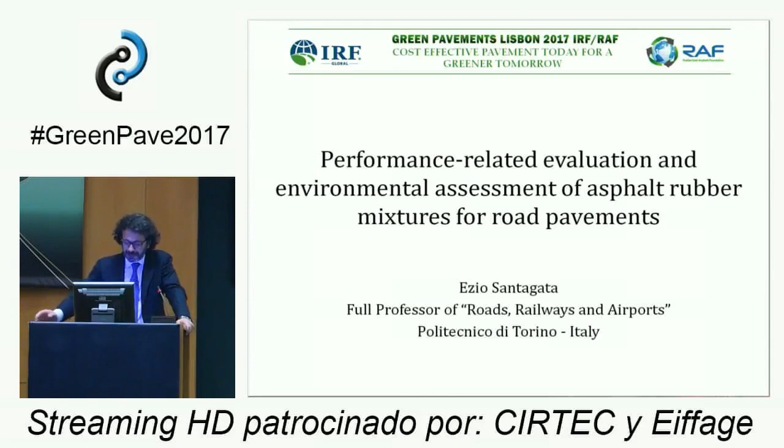The opportunity is to talk about asphalt rubber mixtures and materials, which is one of the areas of specialty of my research group in the last, I would say, 10 years.

Brief outline of my presentation. I will spend a few words on my institution, the Politecnico di Torino, and talk briefly about my pavement engineering research group. Then I will try to put the subject of crumb rubber-related technologies in perspective by showing what is the state of implementation in Italy, and what are the problems we had to face in the past and we are still facing. From that, I will move to a series of what I think are unsolved dilemmas, areas of knowledge which should be further investigated, highlighting some of the most relevant research needs. Then I will show you, following our research approach at the Politecnico, some hopefully interesting results touching upon several topics mentioned by previous speakers. I will also highlight some doubts, because doubts are important as they lead us to a better understanding of phenomena. Finally, I'll try to close up with future perspectives.

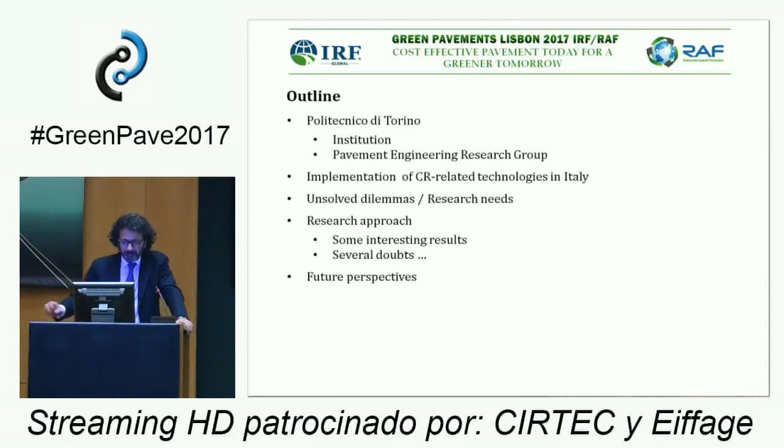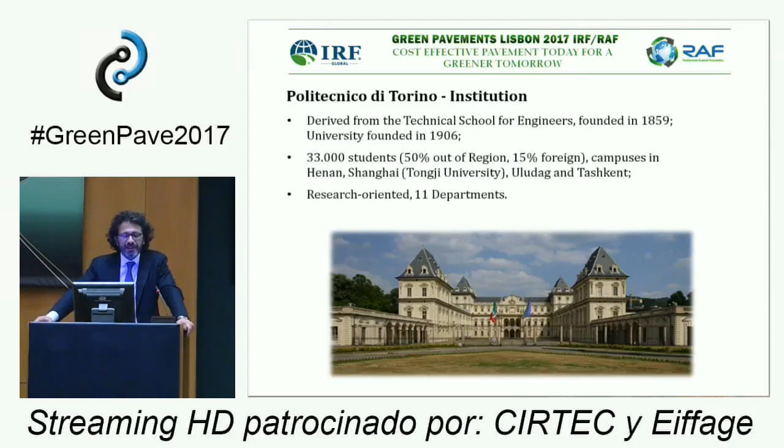Just a few words on my institution, the Politecnico di Torino. It is, I would say, one of the leading technical universities in our country. It was founded in 1859. It has a quite large student population with an international flair. We have campuses in China, in Turkey, and in Uzbekistan, and nowadays it is organized as a pretty much research-oriented university.

My group is composed of young, enthusiastic people. We focus on bituminous materials and pavements. Our laboratory, the core of our activities, focuses obviously on bituminous materials, but more generally on innovative and recycled materials, which fits perfectly with the subject of green pavements. Finally, we provide a number of services, including testing services and specialized training.

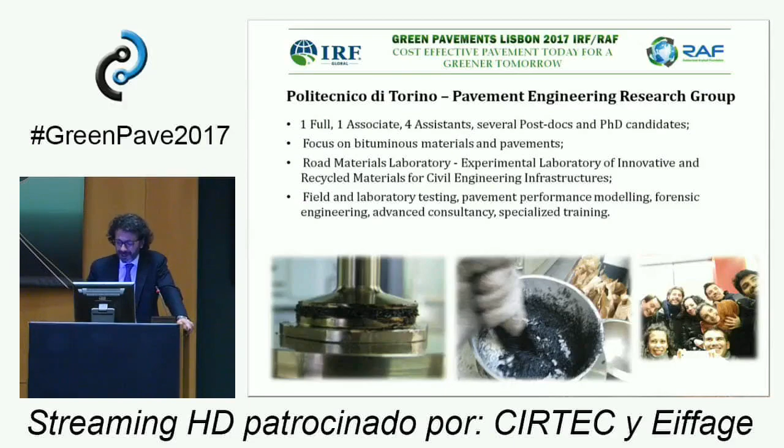We have this international attitude. Currently, we're hosting Professor Underwood from Arizona State University. He's in the audience, and he'll give a presentation in the afternoon. Of course, we have several exchange programs going on.

Just to give you an idea of the type of activity we carry out, it has changed over time, starting from the 60s to nowadays. If you look at the red portion of those pie charts, you can see that progressively our lab and group has shifted from testing and quality assurance services toward a core of research activities and projects.

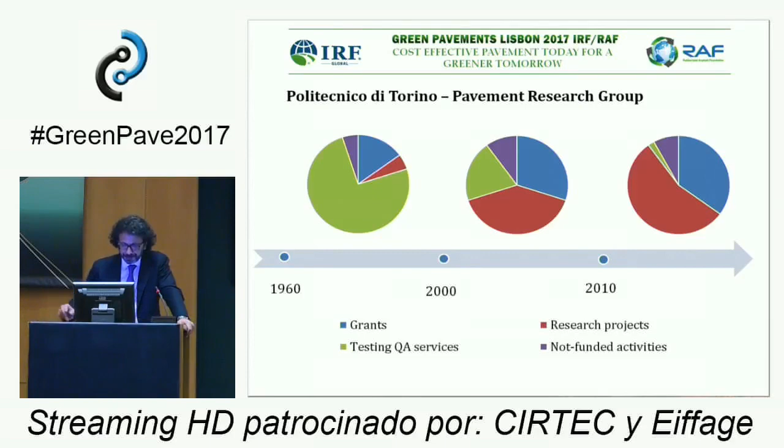So getting to crumb rubber-related technologies, what is the situation in Italy? Well, I think we should observe that there is a widespread establishment of end-of-life tire grinding plants all over the country. What is this crumb rubber used for? Well, a lot for energy production, unfortunately - so George will get angry now, but this is the situation.

Some of it goes for recycling, and of course, as pavement guys, we would really support the idea of using these materials in pavements. However, there is one constraint, a local one, which is that of a single asphalt rubber supplier in Italy. This makes things quite complicated, as it's a true obstacle in attributing construction works if there is a single supplier.

So we need some kind of competition to get things going, of course. Nevertheless, there has been a lot of experience on gap-graded and open-graded mixtures for local and provincial roads, and eventually some increase in experience on stress-absorbing membrane interlayers. I think there is a need to expand the realm of possibilities, and recently we've worked quite a bit on dense-graded mixtures and on hybrid mixtures with low temperature applications and low viscosity additives.

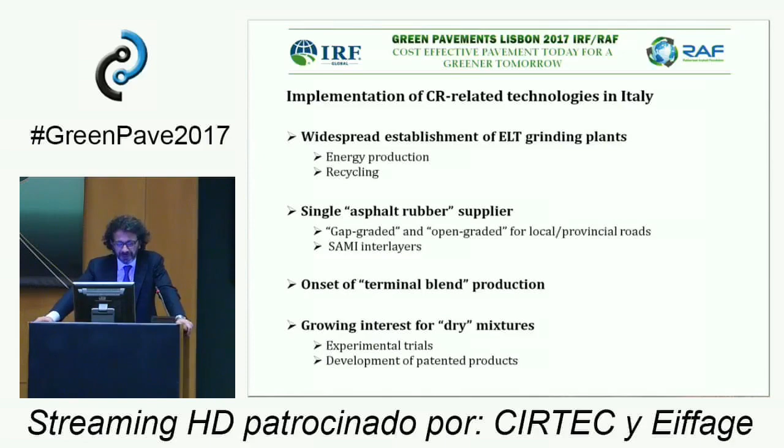The constraints for implementation following this scenario are a limited direct experience and information. Even though the number of applications is increasing, for administrations, the numbers and the quantities are still small. So we really need to put an extra effort in disseminating knowledge, in showing our results, in lobbying if the case. As a professor, I can do part of the research, do it rigorously, and show that it works if it does.

And there is an absence of technical specifications. This is another constraint. If these materials are not in technical specifications, regardless of their good reputation, there is a formal problem. So we need to get these materials into technical specifications. Maybe in part answering one of the questions asked by George, we need technical specifications because this is the engineering way to do it. I don't know if the escort service is implied in technical specifications.

So as I mentioned, we need a wider commercial competition, and we need to answer unsolved dilemmas. So any professor would conclude more research is needed—okay, we're happy with that. Now, what about the unsolved dilemmas? I tried here to highlight some. I understand this may be a little bit technical, but I'll try to raise some interest in these bullet points.

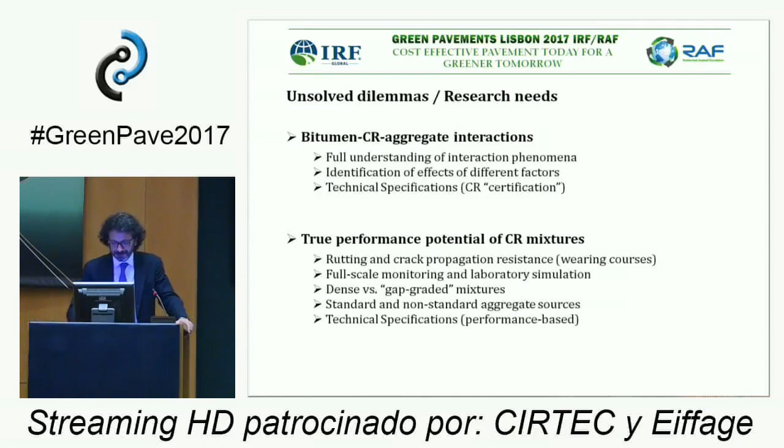On a different level, we have issues related to health risks and life cycle assessment—something which has to do more with the social and environmental components of the overall sustainable pavement. Now, with respect to health risks, one of the topics that has been debated quite a while is that asphalt rubber can be really bad for workers' health. And this derives from just one problem: the smell, okay? But does this imply that it is bad? We cannot just answer no with no information.

We need to investigate, and we've done this for quite a while, looking at the gaseous emissions produced on site. We did a lot of sampling and laboratory testing. In the laboratory, we simulated possible emissions and always compared the results obtained to standard mixtures.

Per se, gaseous emissions are not good, for any kind of asphalt-related application—that's not what you'd want. But when you compare asphalt rubber products to standard products, you may see a small difference, and in our experience that difference is small. This can be sustained by the modeling of toxic and carcinogenic effects. Once we have this data, we can go to administrations and say, look at these data, they show there is an equivalency between these two kinds of applications. So it's very important.

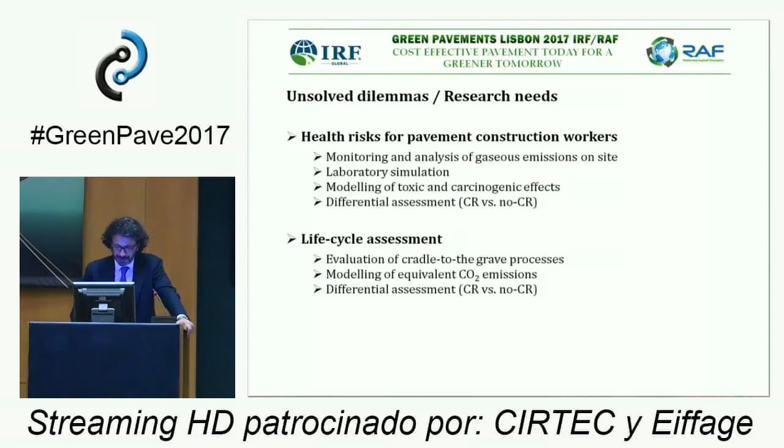These slides describe quite a bit of what we've done, with several examples. Just to give you some information on the approach, we moved from the local to the international scale with several projects—local, city, provincial, national, and European—and in each case we adopted a multidisciplinary approach, combining the know-how and experience from the pavement engineering group and the sanitary environmental engineering group.

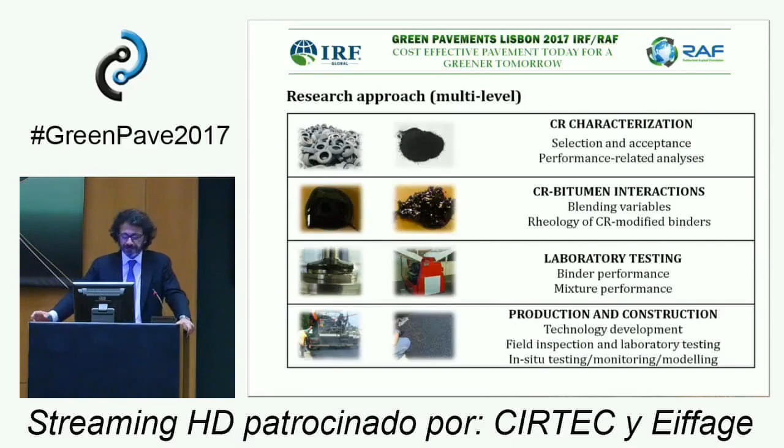So we are two groups in the Politecnico working very closely, and we work at a multi-level structure, moving from crumb rubber characterization to the analysis of crumb rubber-bitumen interactions, which could be asphalt rubber, or the mortar formed within a dry mixture. We do a lot of laboratory testing for performance predictions, and then of course field testing, which includes technology development. I'll try to be synthetic in illustrating some of these results.

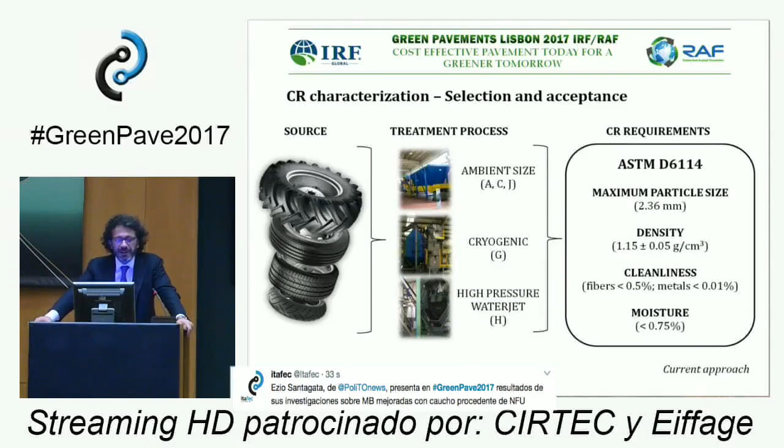Starting from crumb rubber characterization, in the literature there are some requirements for acceptance. Regardless of the treatment process, there are constraints related to maximum particle size, density, cleanliness, and moisture—very basic, listed in ASTM D6114. This is the current approach, but it really doesn't tell you the true value of a crumb rubber product.

First, we need to organize the standard information in a better way. One good example is particle size distribution. We sampled at least 20 to 25 different products, all sold or available for asphalt rubber production, and found a huge difference in particle size distribution—not only with respect to ASTM standards, but in absolute terms. So we suggested formalizing three different categories: coarse, standard, and fine gradation, in order to tailor different applications for different end properties.

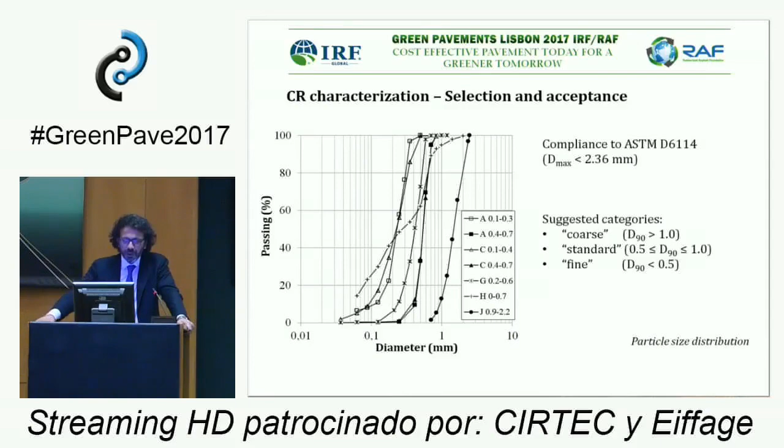What about density? This is a histogram of different densities obtained. We observe that densities are comprised within quite a narrow range. Of course it's rubber, and from one tire to another the variation in density is limited. Nevertheless, density is important if you want to make predictions on surface area, so let's keep it as a good requirement.

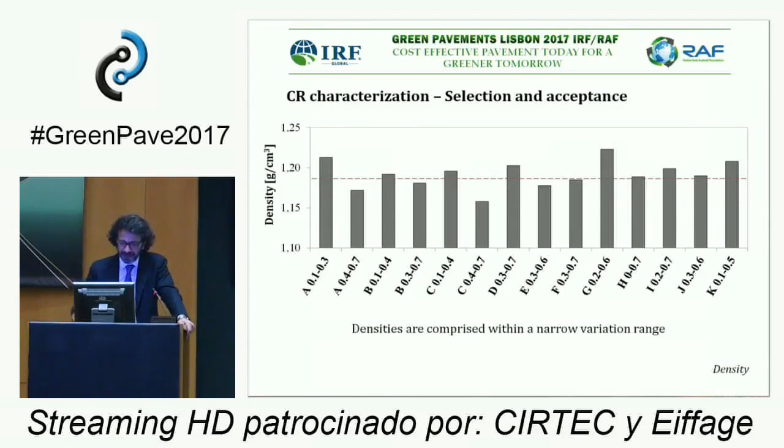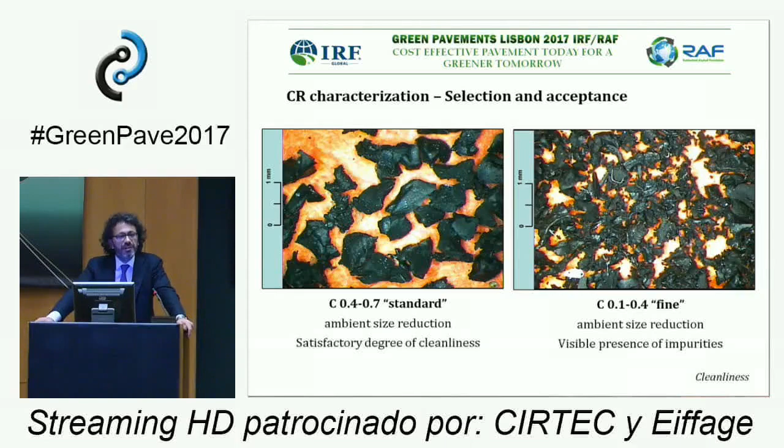What about cleanliness? Well, cleanliness has to be looked into. We usually do this by microscopical observation. In general, we observe a visible presence of impurities, metal impurities, in finer products. So this should be looked at with care.

And one very important thing is morphology. What is the ideal shape of crumb rubber? Do we want stretched and corrugated particles, or more compact, round or polyhedric particles? Depending on the kind of interaction we desire, we may have different requirements, but we need to put a number to that.

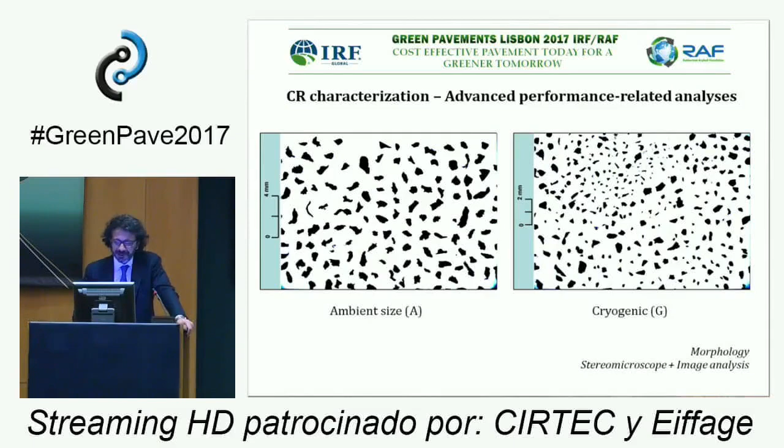So very simply, we do some microscopic observation combined with image analysis. We convert particles into objects which have physical quantities, and for these quantities we can make a modeling which allows us to calculate surface area, a true surface area which takes into account the degree of elongation and the surface irregularities of the particles.

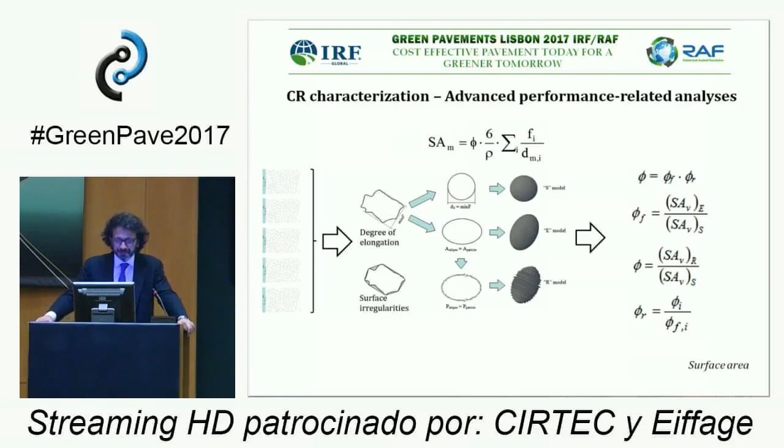Okay, so coming to bitumen crumb rubber interactions. What about these? Well, we do know that there is a time-dependent interaction going on, which starts from mixing and goes through a swelling phase, and it leads to depolymerization at a certain point, and eventually it can lead to digestion. And we know that the time scale of these phases and their extent is affected by several factors, listed there: the type of base bitumen, the properties of crumb rubber, the presence of additives, and several mixing variables such as temperature, time, and shearing forces. So we need to take them all into account.

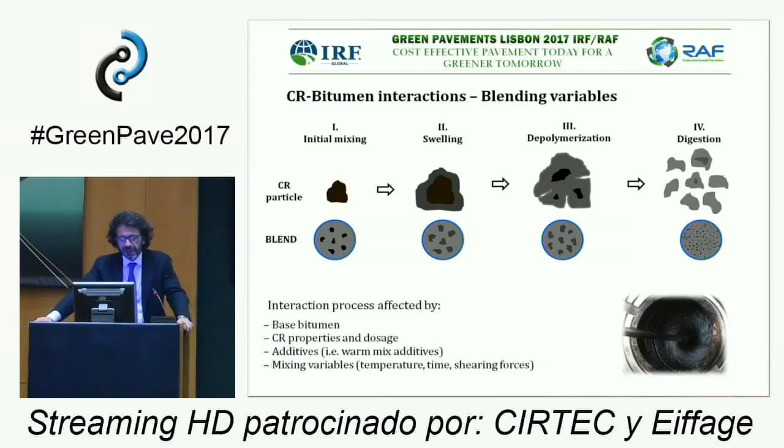And this is important because depending upon how this process evolves, the product will be different. Now, this is a very good figure of viscosity tests in which, for a certain crumb rubber, we see that as a function of curing time, viscosity peaks and then degrades. We know about this, okay? But what we've done is to introduce two numerical parameters, a swelling rate and a degradation rate, which simply are the slopes of the upper and the down curve of this graph. And these will synthesize the time-dependent interaction of bitumen with crumb rubber.

So to me, ideally, in a spec, any producer of asphalt rubber should give information on this, because when we produce asphalt rubber, we want our material to be very close to this peak. Usually, the assumption is that it should be produced to be slightly green, not totally ripe, so we want to be very close to the peak. And in order to be there, we need to have information on the swelling rate and degradation rate of our product.

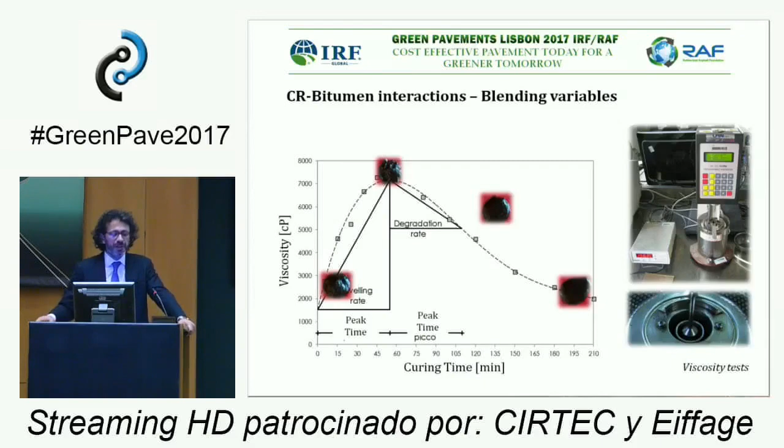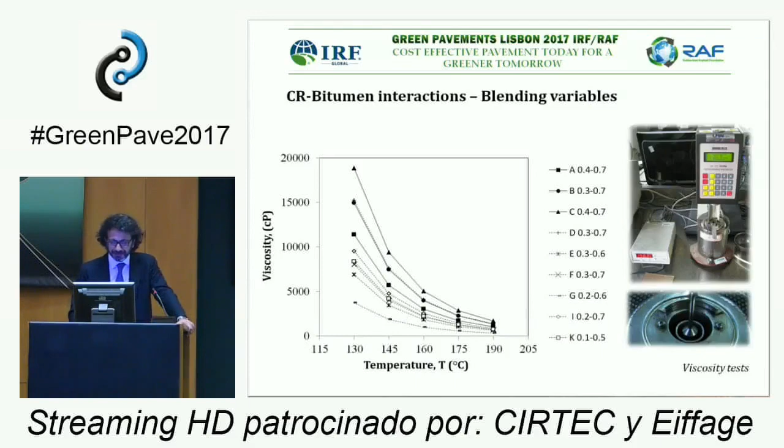And of course, if we do not have this information, we may produce different binders with the same base binder and different crumb rubber products and obtain viscosity curves which are completely different. Now, this means that either the crumb rubbers are really different, or they have been sampled and stopped in production at a different point in their evolution. So this really shows that you can get any number from viscosity if you don't control those two factors I'm talking about.

And of course this also reflects on rheology. We do a lot of rheological testing, producing master curves of the complex modulus and the phase angle. We can get a lot of information from this data and relate it to performance, but this needs to be related to production conditions. If not, these are just numbers, they are of no use.

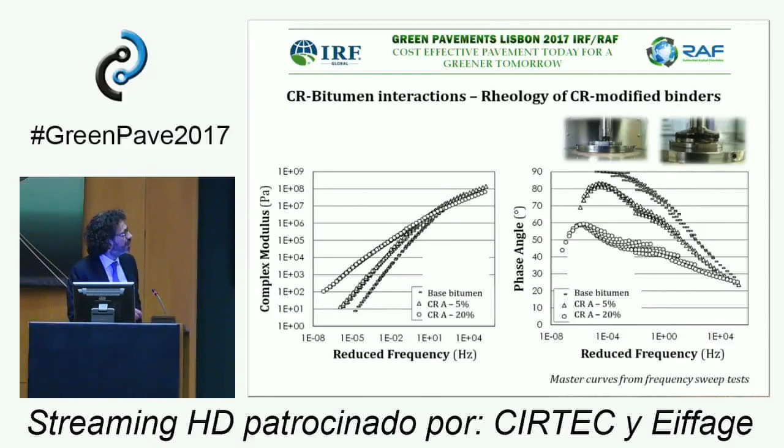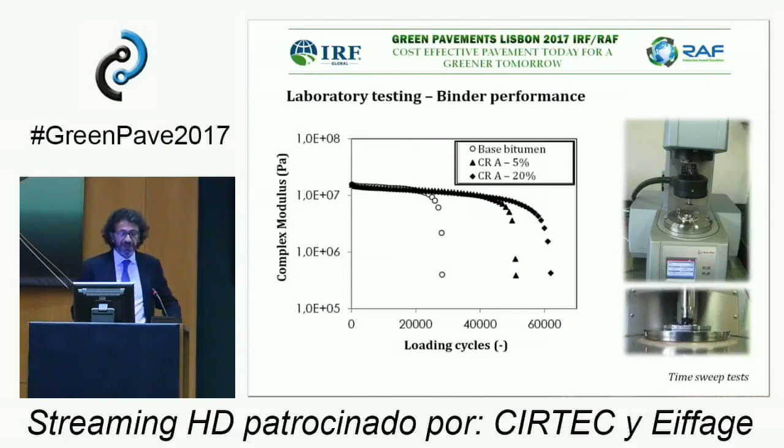This is quite interesting. What about fatigue? This is quite nice. These are repeated time sweep tests carried out on a base bitumen and on different blends obtained with increasing quantities of crumb rubber. Does fatigue life increase? Yes, it clearly does, and this is also shown by my mixture testing.

What about resistance to rutting? Once again, we have very good results here. If you look at this asphalt rubber product, this is the non-recoverable creep compliance, let's say deformability, permanent deformability. Very small when compared to a polymer modified binder with high polymer content, a polymer modified binder with low polymer content, and neat bitumen. Okay, this is really impressive.

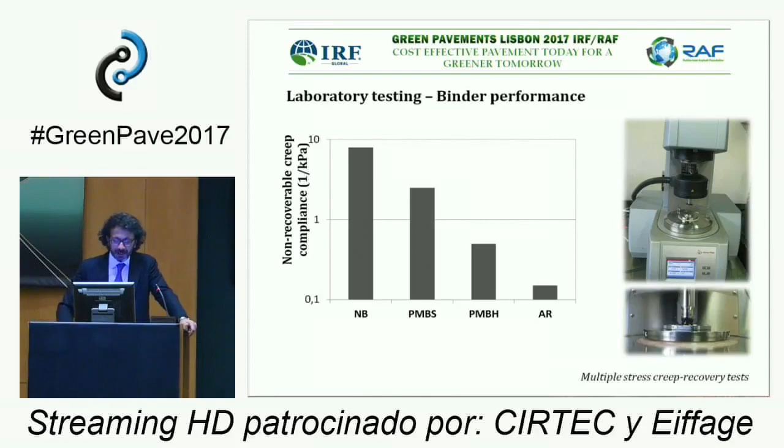So what is going on? Is there anything wrong in this? Well, is it bad performance or is it ineffectiveness of testing protocols? And I guarantee that the right answer is the second one. We need to use the right protocols to investigate, in comparative terms, the performance-related potential of a material.

Now, the problem here is that in wheel tracking tests we have no lateral restraint, and with non-continuous grading curves this will be really penalizing. So we cannot go with this kind of testing, or we can use it, but then we need to twiddle around with the data, and I don't think that's the right way to do it.

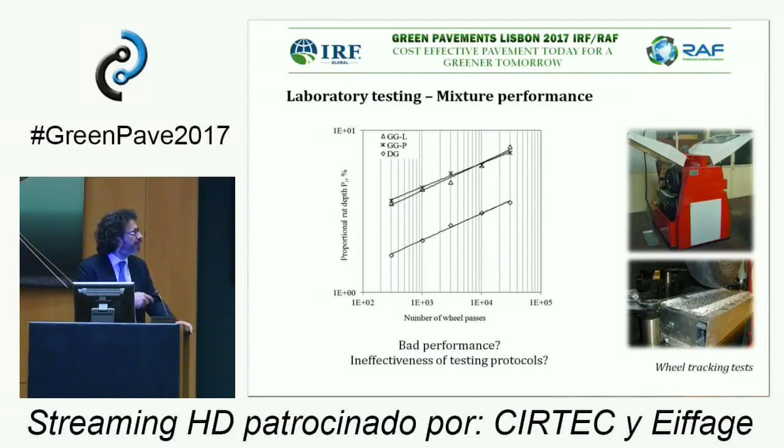So we can approach this with different pieces of equipment, such as the asphalt mixture performance tester. In that case, we will need to apply a confining pressure. But really, this is a good example of what could be a wrong conclusion if just presented in very simple terms. Look at the numbers and you get a wrong conclusion. So we need to really be careful.

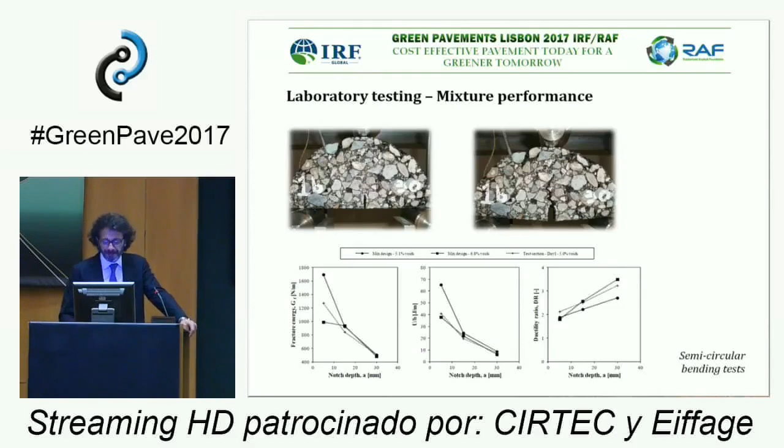And similar observations should be done on crack propagation. We want our material to have a very high toughness, and this will occur with the presence of rubber, but we need to choose the right configuration, and in particular the right notch depth, in order to highlight the true effects of rubber. If not, we have the same risks I just showed you in the case of permanent deformation.

Some words on part of the activities we developed in technological development. As part of a European project, the TYREC4LIFE project, we worked on the design and construction of a full-scale dry mixing prototype. The idea was to have a prototype which could be flexibly used with different types of crumb rubber, with different quantities, and allowing crumb rubber to be used both in hot and in cold conditions.

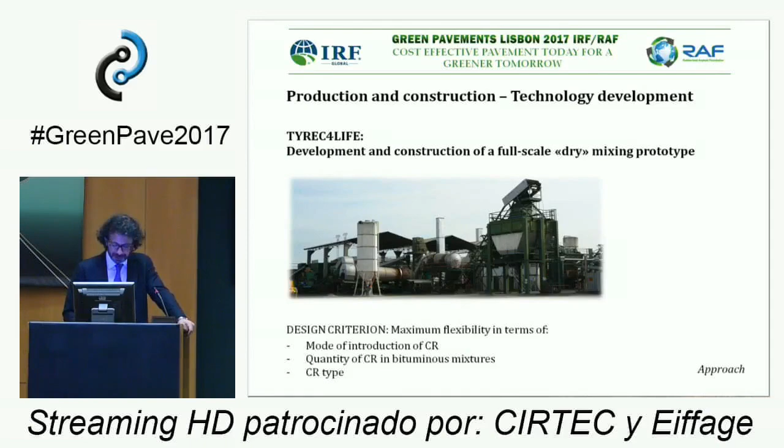We had a base plant which needed to be modified. We opted for the use of a double drum which needed to be introduced into the plant, and we had the possibility of having two different crumb rubber feeders with a conveyor belt. The idea was to introduce the crumb rubber not too close to the burner, by employing a double drum. In the double drum, the crumb rubber used is in the space between the two drums and is not overheated, and therefore is not consumed before being mixed.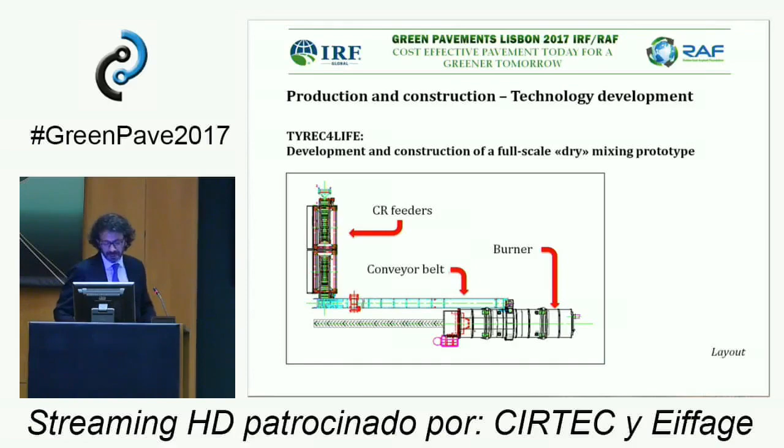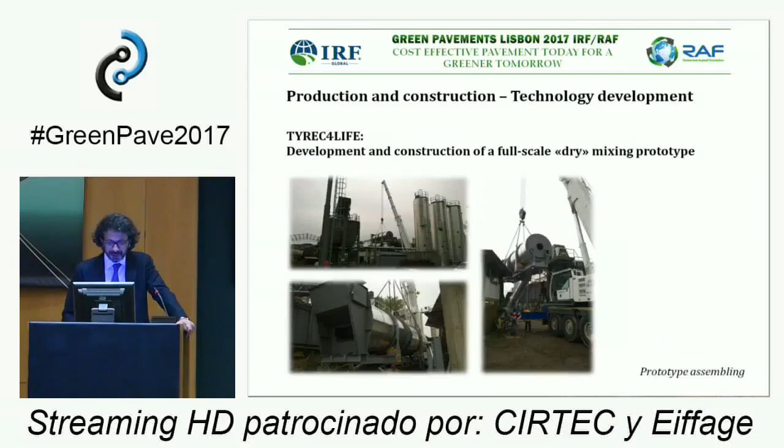So this is the double drum being delivered to the plant, and then there was some assembling going on. We did some initial calibration, and then we had some full-scale trials.

Full-scale trials in which we tried crumb rubber in dry application, both ultra-fine and coarse crumb rubber, and we tried it both in the wearing course and in the base course in different combinations. Then we monitored the traffic to which these cross-sections were subjected. Now we are working on the data, and they are quite interesting.

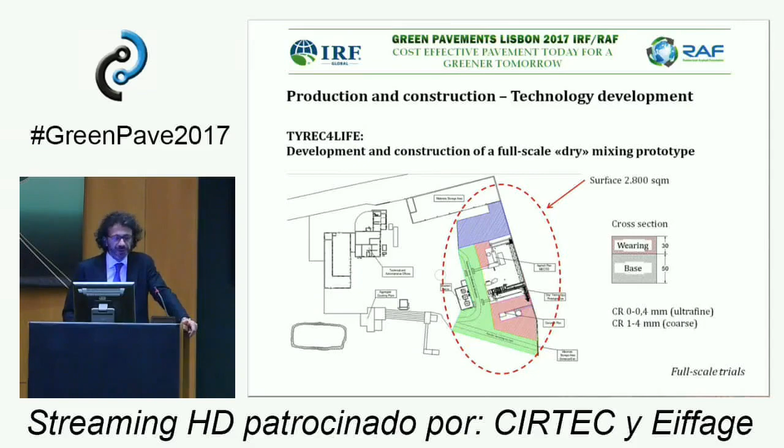One of the greatest issues is, of course, compaction, so you need to adopt special care in compaction. This is the first problem. The second problem is mixing time. We saw that depending on the type of crumb rubber, these may be quite sensitive to mixing time. So there is some need for experience in this area.

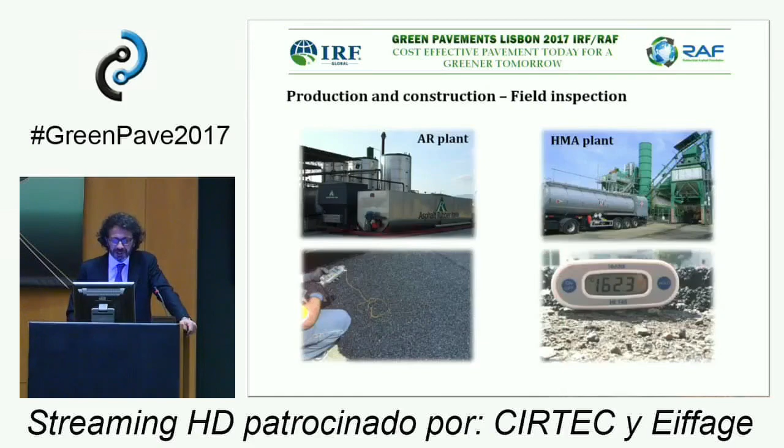Now, very quickly going to other topics, of course we do a lot of field inspections in our projects, and then we go back to the lab and do some testing. We have one very simple problem which I think should be solved: what is the quantity of asphalt rubber in a mixture?

In a performance-related approach, we don't care, but of course we need to control it for financial reasons. We want to be sure that all the bitumen, all the asphalt which was designed, is there. And if we use the solvent extraction method, we are not able to separate crumb rubber from the aggregate. If we use the ignition method, there is some unburnt material.

So in both cases, we have an underestimate of asphalt rubber dosage. We can calibrate it, of course, but this is one big problem, because if an administration does not have a simple tool to control asphalt rubber dosage, it is a problem.

Okay, another example, I don't have a slide unfortunately. What about the quantity of crumb rubber in asphalt rubber? Can you look at that? Once again, you could say who cares, I'll just look at the properties of the binder. Well, for financial reasons, I may want to check what is the quantity of crumb rubber in a binder. Can you do that?

Well, it's not easy. We've come up with a combination of thermal and chemical analyses. I forgot to put it in the slides, but I have a paper on that. If you're interested, I can provide you with some information. So these are problems which have a reflection on the diffusion of these technologies.

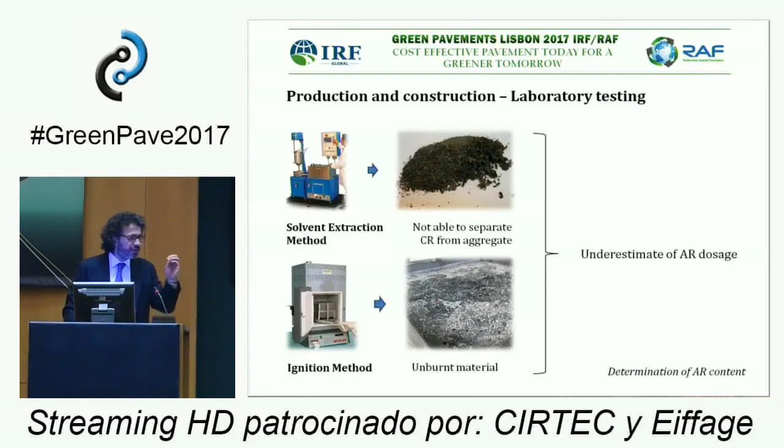What about safety-related problems? Well, of course, we need to look at this in full-scale sections. We've done this with one administration close to our city, and we compared gap-graded and open-graded asphalt rubber courses with a porous asphalt. We looked at macro texture and at skid resistance, and followed through in time. There is some variation due to wear operated by tires, but we are following through on these sections for long-term monitoring of these applications.

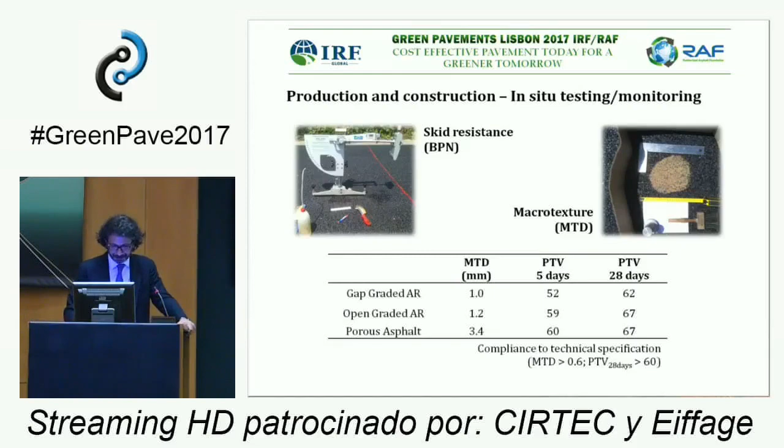What about noise? Noise is another issue. The approach we adopted with the Fiat group, now Chrysler Fiat, was to use an instrumented vehicle with microphones both inside the vehicle and close to the tire-pavement contact. We employ the coast down procedure, which means the vehicle approaches the section at a certain speed, then the motor is turned off, and we just have the rolling noise.

In the cabin, with the use of rubberized materials, we have a decrease of 3 to 4 decibels. For the external microphones, we have a reduction of 5 to 6 decibels. This is very interesting because it's just rolling noise, and that is where you get the greatest contribution from a very flexible interface, such as that created by rubber. We've published these results at a conference in Korea.

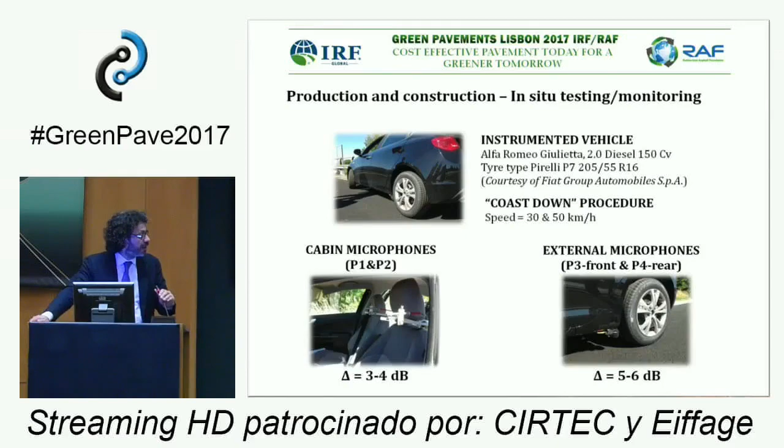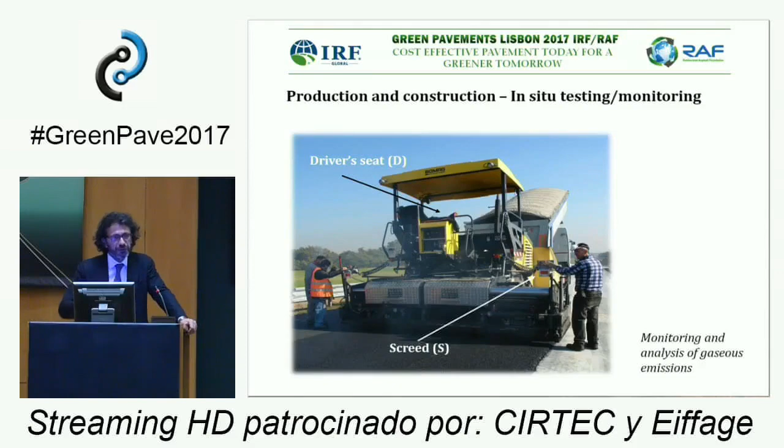Finally, getting to more environmental or social aspects, I mentioned the need of monitoring gaseous emissions. We have our own procedures, applied to many construction works. We sample gaseous emissions at the driver's seat and at the screed, under the most stringent conditions, when the hot mixture is discharged from the truck to the paving machine. There is a given procedure for sampling and for analysis in the laboratory.

What we focus on typically are the VOCs, the volatile organic compounds, and the PAHs... I forget the name, the hydrocarbons. These are basically compounds which may have toxic and carcinogenic effects. Carcinogenic effects are related to a given rate, a given slope. Toxic effects occur if they're above a certain threshold. Nevertheless, we need to monitor them.

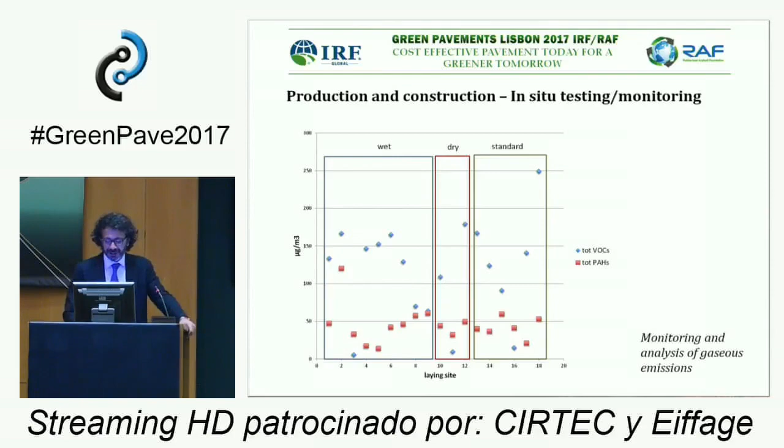If you want more detailed investigations, you can go to the laboratory scale and simulate gaseous emissions there. We set up our own equipment, and here you have a comparison between gaseous emissions in a laboratory test and in field sampling. This is the equality line.

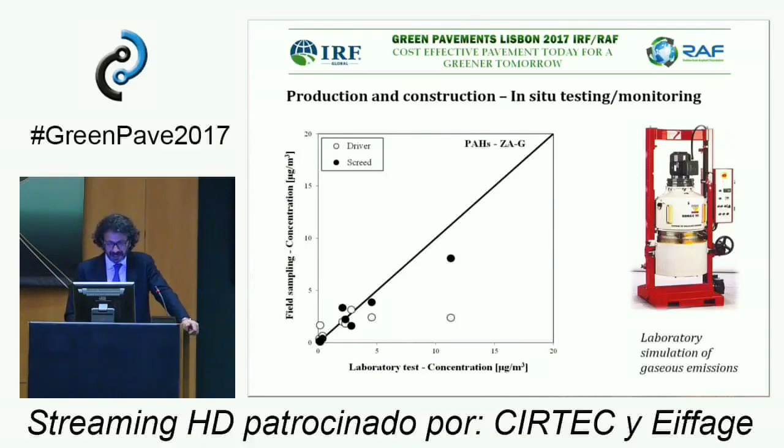You have some dispersion, but on the big numbers, in the lab, we simulate quite well what is going on in the field. Eventually, we can use these data to be fed into the modeling of toxic and carcinogenic effects. So we start from the site assessment. We need to have a conceptual model and a diffusion model.

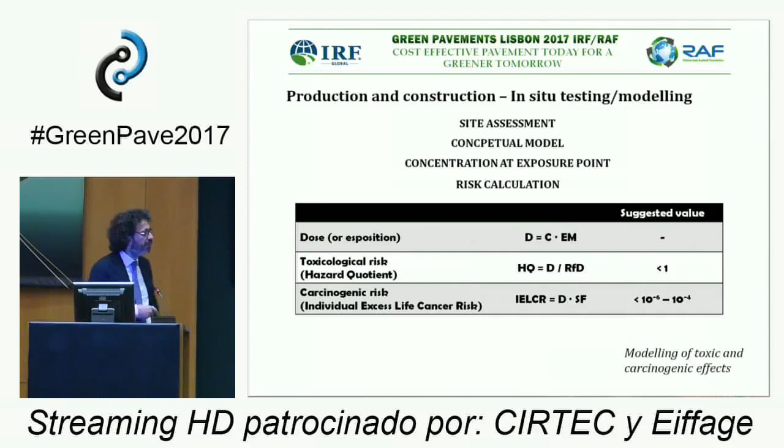And eventually, we come up with the risk calculation. So we need to calculate the dose of the compound to which the worker is exposed, the corresponding toxicological risk, and if the material is carcinogenic, the potential carcinogenic risk. Once you do those calculations, you can perform them in different conditions by looking at the experimental data from the driver and the screed, comparing different solutions.

Here we have ratios, wet to standard, dry to standard. Now these numbers are all very close to 1. In this very global evaluation, 1.2 is no different from 0.89, okay? There are changes when you have orders of magnitude of change in terms of the ratio.

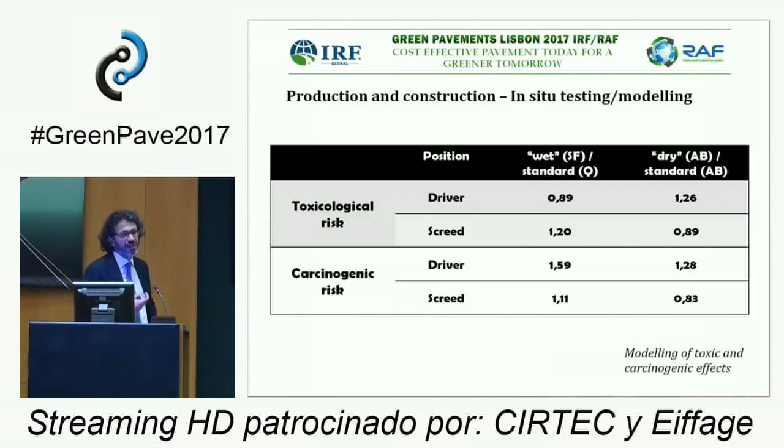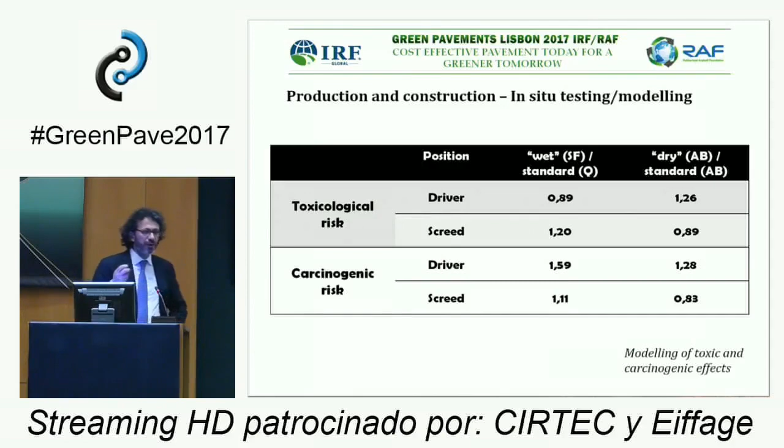So really what you conclude from here is that there is almost an equivalency between the exposure, either toxic or carcinogenic, for rubberized and non-rubberized materials.

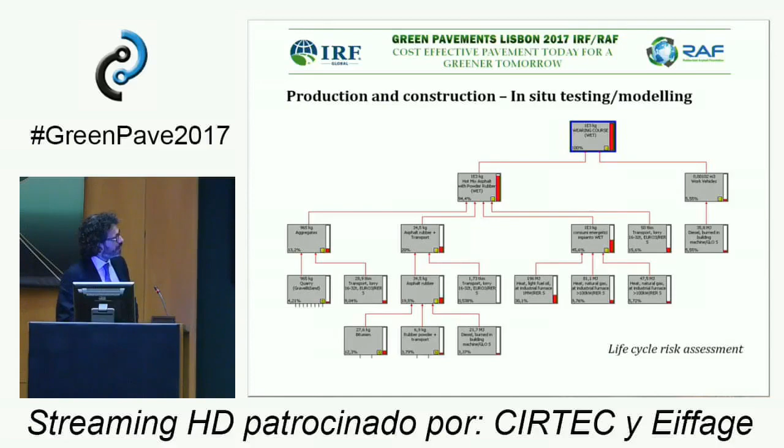Finally, last point of the possible menu of activities we've been developing is related to life cycle risk assessment. And life cycle risk assessment, of course, is based on what are the energy consumptions and the CO2 releases which are connected to each phase of the pavement construction.

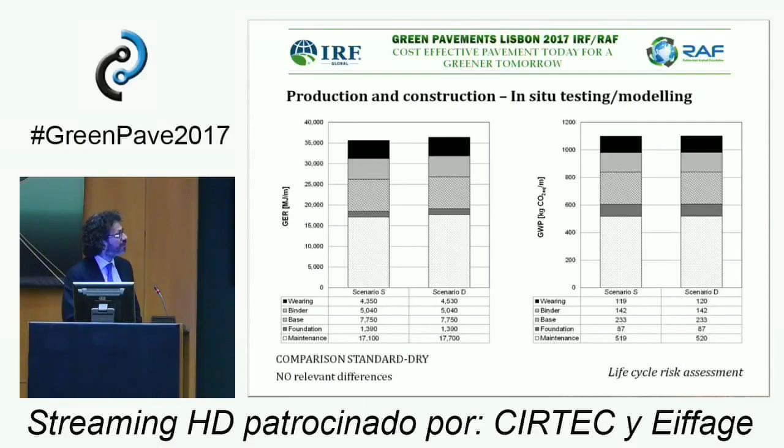Same thing can be done by comparing standard to dry. And in this case, nevertheless, we see that there is a limited difference. So we can see that there are no relevant differences, at least for this specific case study. The reason is that at the time we performed this study, we did not have sufficient data to suggest that layer thicknesses could be reduced with the presence of crumb in the dry form within the mixtures. Once we increase our knowledge on those mixtures, perhaps this comparison can change its result.

And I think that we need to work on crumb rubber specifications for paving applications. We need to have an approval system for these materials, and this could include some physical chemical characterization, simple, not too complicated, but clear, and some rheological testing on model systems.

We need to improve performance prediction models, and the key part for this is full-scale monitoring. We have several pilot sections in Italy and other countries. Very often what we lack is the information that follows through in time.

How did the section behave? What were the problems? Do we have true data? So we really need to work on this. And of course, this needs to be supplemented and supported by performance-related testing.

More work needs to be done on terminal blends and dry mixtures. Our group in Torino is working on both. And currently, we're devoting a lot of attention to mix design issues. Perhaps you can have a good design, let's say a robust mix design, even by employing a very simple approach. But of course, you need to validate this. Okay, so we're working on that.

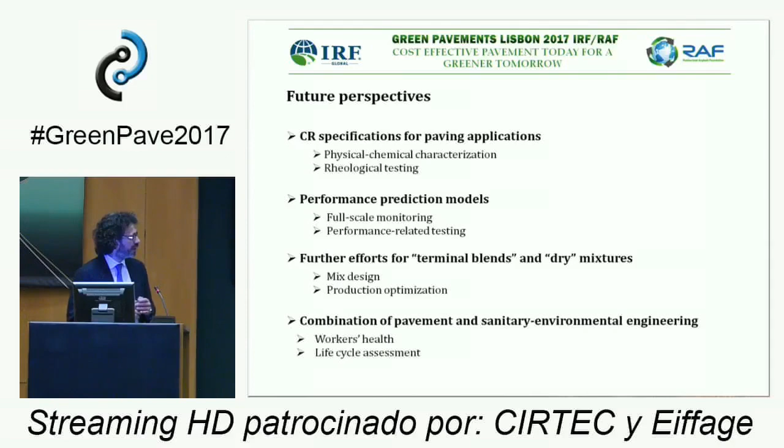And finally, as a closure, I think that the two components of pavement engineering and sanitary environmental engineering need to be kept together. This is so important, and it is important within the general concept of sustainability and of green pavements. So with that, I thank you for your attention.